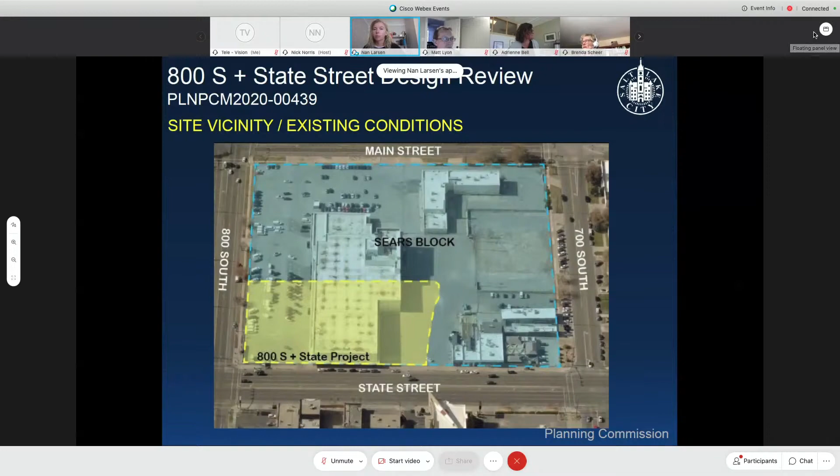Salt Lake City received a request for a design review for modifications to design standards to develop the property located at approximately 745 South State Street. The project is a proposed 11-story mixed-use development with 360 residential units, with common areas on the upper floors and commercial and retail uses on the ground and second floor. The project site is located in the downtown support district and is within the downtown master plan.

Presently, the project site is occupied by a vacant, what used to be the Sears building and surrounding parking lot. The Sears building was vacated in 2018 and has remained vacant since.

Planning staff is requesting the Planning Commission review the proposed design standard modifications as a work session to provide the applicant and staff feedback before the design review returns to the Planning Commission for a public hearing and a final decision. This work session is also a good opportunity to discuss the changes Kimball Investments and Colmena Group are proposing on the larger Sears block.

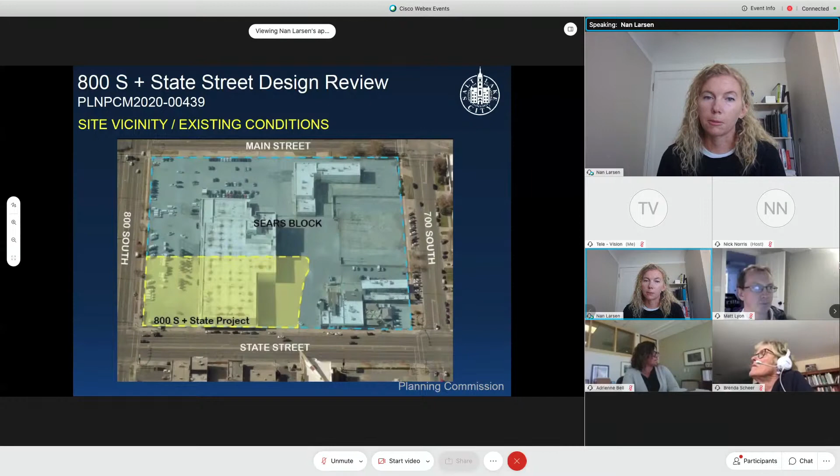I'll just go through a brief review of the project to give you additional time with the applicant to discuss for the work session. Presently, the project is meeting or exceeding the majority of the design standards required in the D2 district.

This includes ground floor use other than parking on at least 80% of the street-facing building facade. Durable building materials which cover at least 80% on the ground floor and 50% on the upper floors. Glazing covering at least 40% on the ground floor and 25% on the upper floors. And the blank wall maximum length of 15 feet.

The design standards requested by the applicant to be modified through the design review process include the maximum length of a street-facing building facade of 200 feet. The applicant is requesting 373 feet for the building length.

Additional building height exceeding 65 feet up to a maximum of 120 feet. The applicant is requesting 123 feet with a 5-foot parapet wall, which is allowed to exceed into the maximum building height. The final request is for operable building entrances at least every 50 feet on street-facing building facades. The proposal includes a range from 35 feet to 90-foot separation.

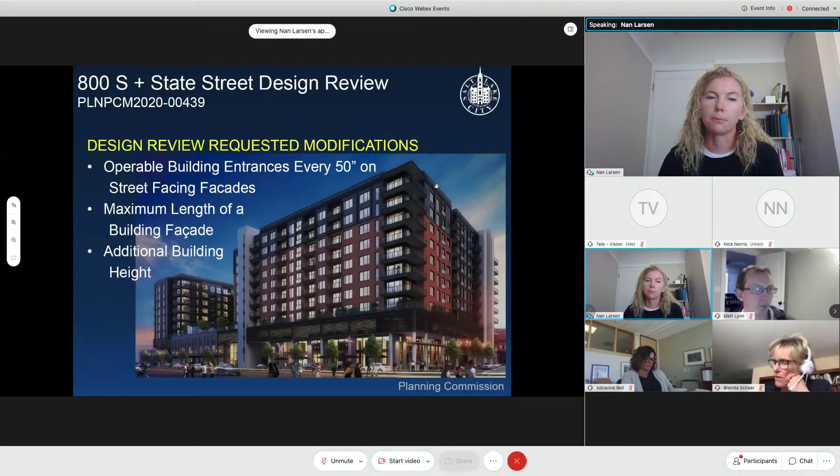Representatives with Colmena Group and Kimball Investment have worked with planning staff and have been very responsive to planning comments to change the building design to better interact with important city corridors.

Staff is recommending Planning Commission consider 3 questions in their discussion with the applicants to provide feedback on the requested additional building height and facade length of the proposed project. The first question is, are the setbacks, material changes, and glazing sufficient to warrant an approximately 85% increase in the street facade length while still maintaining a rhythm and repetition experience for the pedestrian?

The second, while the downtown master plan identifies South State as a mid-rise corridor, does the architecture justify the visual impact of the requested additional height by providing a well-designed building with a distinct top, middle, and bottom interest in the structure? And when determining whether the subject property relates to the height and scale of adjacent and nearby properties, should the redevelopment potential of adjacent properties be considered?

And that concludes my presentation.

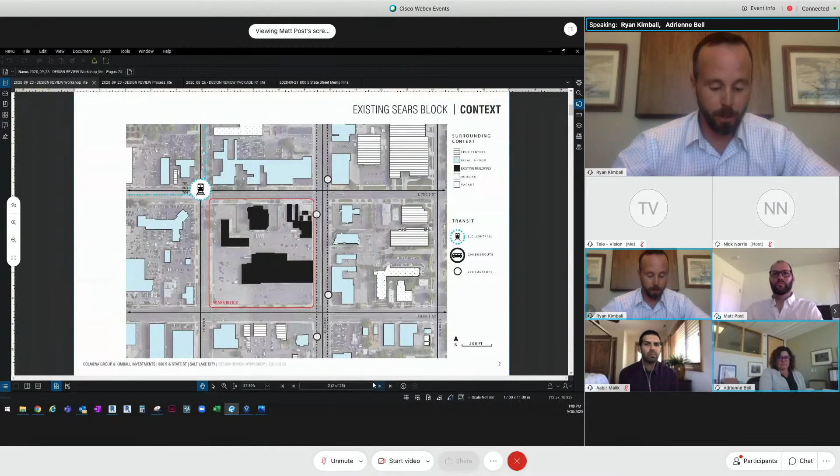Let's see, Matt, next slide. This is the block today. We are fortunate to have great neighbors. Center block along 700 South is the recently razed Deseret Mortuary, now owned by the LDS Church. SAPA Investment Group, along with Retrospect Water and Light, are just to the east, and we value each of them and very much see both as a benefit and amenity to our future residents and tenants.

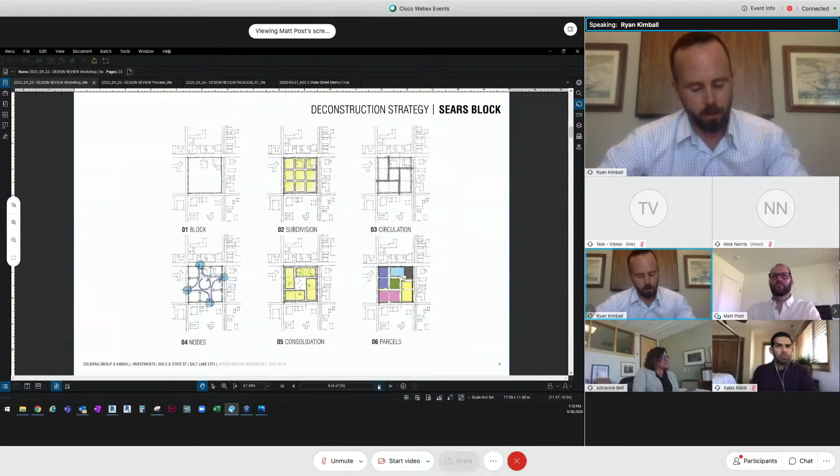The opportunity to deconstruct nearly an entire super block is really exciting. Our focus to create a strong yet welcoming edge with defined and accessible passageways into the center park, reminiscent of the interior community agriculture espoused by the Plat of Zion - the 660-foot-long super block was broken into 9 quadrants, each approximately 200 feet by 200 feet, separated by streets. We further refined the quadrants by connecting the ones along the edge to optimize the number of vehicular penetrations to the core. The strategy optimized the circulation of the vehicles within the site, as well as allowing pedestrian connectivity through to the park.

We have actively worked with the mayor's office, city council, RDA, and staff, and have noted the common sound bites from each, which include: Salt Lake's master plan shows downtown extending south to 900 South. Density was encouraged. Incorporate the city's Life on State plan, which specifically mentions living and retail opportunities with a focus on healthy and sustainable design, and proximity to transit.

We have worked with the city and others to successfully add a new TRAX station at 650 South Main, which is the southernmost Main Street station and critical to connect Copper Yards to historic downtown. The Jetty, along with the park, is the first phase of several and will begin to bookend the southern border of downtown, as well as kick off the State Street redevelopment area.

It is important to note that the Jetty is the only phase that faces a state road. As part of the master plan, we have met with UDOT to determine where our State Street access will be allowed. UDOT mandated the distance away from the 800 South intersection, which happened to also be the approximate location of the future mid-block crossing.

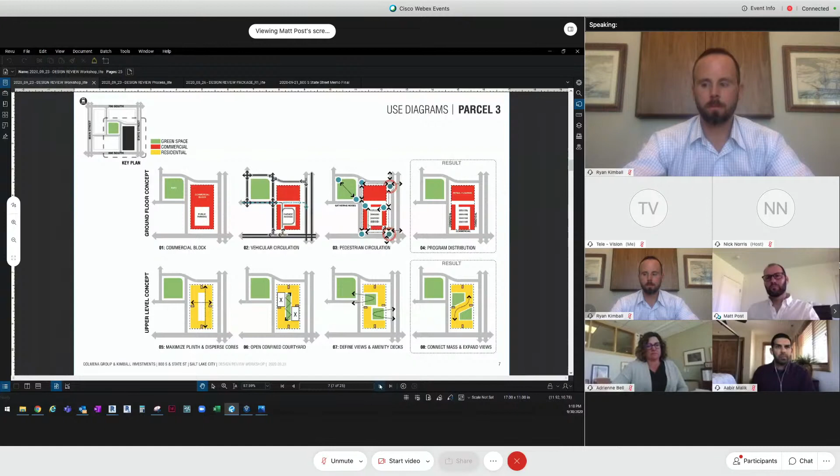So we started playing with the building in terms of allowing those spaces not only on the ground level, but also on the upper level that break the mass and allow us to have a different configuration as you walk around the building. In the book we provided, you have a lot of other diagrams that illustrate how the mass is being carved to articulate all of these design parameters that allow us to define the look of the building.

In terms of creating a base, we are very concerned about how the building interacts with the pedestrian experience of the sidewalks around the building. Not only thinking about the vehicles, but more importantly, thinking about what happens when you are experiencing that sidewalk, mostly along State Street, realizing the importance of the corners as well as the porosity to the park beyond.

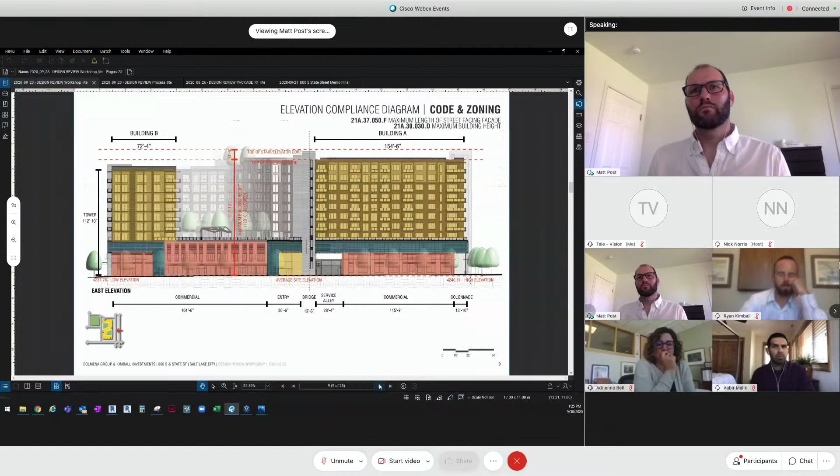In the middle of the building, we have that service alley that's becoming almost a divider, if you will, that creates this mass, and that's going to be the vertical circulation below the building, that is as important to us as it allows us to illustrate how the building is grounded to the site. You will see as well that it becomes iconic in the sense that it allows you to reference where the main entries to the apartment lobbies are located.

You also see that on the fourth level of the building, we do have a component that is an amenity to be used by - and this is a debate that our client's been having of how we introduce, let's say if there's a grocer on this site, on the big north part of the property, that maybe they could utilize that space as well. The question is how we provide a community of 300 or so, 350 apartments, a lot of people living here, with the opportunities to experience not only the city fabric with the park behind us, but also some spaces that are created above the ground right away, if you will.

The height of the building on the right side of this page, which happens to be the north wing, is pushing 11 stories, and therefore it gets right below the allowed height at 120, which counts for a parapet, and we are leaving ourselves enough room such that we know we're going to be able to drain that roof accordingly.

Nan was very careful about telling you that the building has a roof height of 117 feet plus a 5-foot overhang, the overhang being that eave on top of that roof line. There are going to be a couple of components, elevator overruns and so forth, that are a little bit higher than that, and roof screens that hide all the mechanical equipment on top.

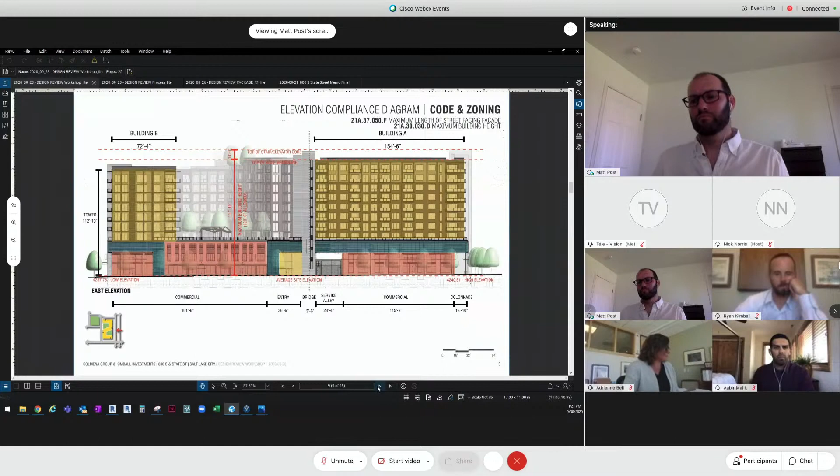But this, as difficult to read as it is, kind of gives you an idea of how we have played the mass to break it into different components. You give me the next slide, please.

So when you look at how the building feels as you come down on State Street, this corner to what we're calling Future Street A, defines that big plinth that is 3 stories in height with, on this corner, hopefully a market that is 2 stories in volume. We're going to allow the market enough space that if they wanted to have a mezzanine that, let's say, projects through with a dining space that hovers over State Street, that would be great. We don't know exactly what's going to happen, but the idea is that base is recessed back, so it's very inviting to people to come in.

This third floor that you see there is a parking garage. It's a full floor of parking that is hidden behind a screen that defines the base for the building as a whole. We're looking at different materials for that. It's going to be a metal that is hiding the vehicles, but it also wants to have some presence in terms of changing facade.

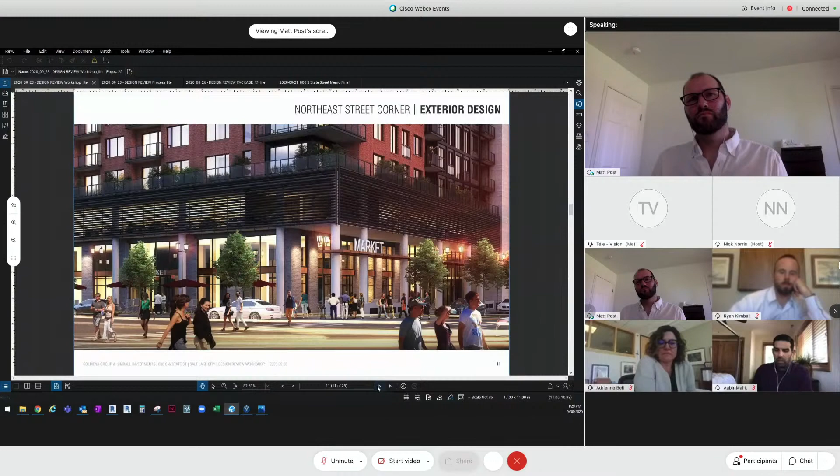Either with metal panels that have bandings or perforated metal materials. The colonnade that you see defines the superstructure to support the upper part of the building, but it also relates to creating an urban experience that is deep in nature and allows that porosity to the retail space on the bottom. Give me the other corner, please.

You're looking at the building now from the south side as we're approaching downtown from the south on State Street, and what you're seeing is that the building has a different look altogether. In the upper part of the building we have that orange color, which is a brick material, and the dark, almost black, we're thinking is a metal material, giving a sense of the industrial roots of this part of town, with materials that are rich and durable on the upper part.

On the bottom, you see how the facade now has changed dramatically. The plinth remains, and the retail base is very similar, yet it's now reflecting the nature of potentially a very different retailer. Abir and Ryan call it the idea of bringing the maker's block by allowing little spaces for boutiques or shops that relate to the demographics that can't afford the big space that a national chain may have.

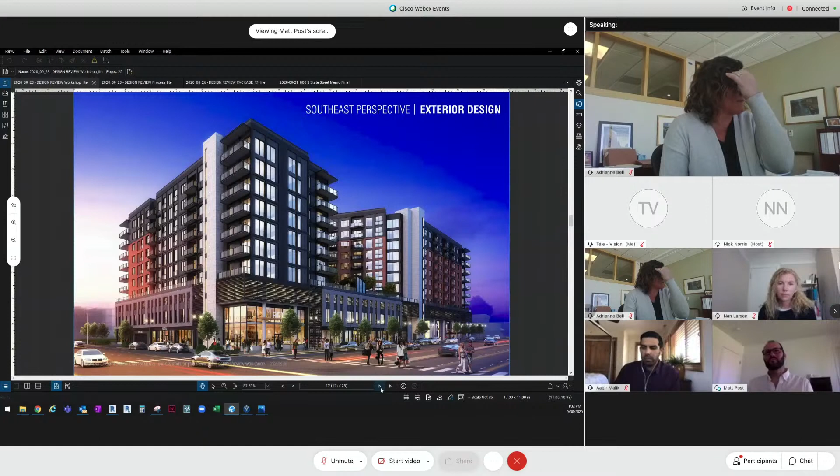The importance of the building having its own unique personality that is different depending on which side you're looking at the building from was a very important element in our discussion within ourselves and also with staff. And the idea that Life on State wants to improve the pedestrian activation of the ground levels.

So as I was saying, the activation of this southern part of the block along State Street is addressing a different type of tenant, and yet the corner itself has a very friendly encounter with the passerby via vehicles and/or pedestrian. What we're really pushing for here is the introduction of a lot of glass, transparency and porosity to the experience that happens between sidewalk and building wall.

And yet you see that the spaces are going to be 2 stories in volume as well, and the facade in this instance now continues up, still hiding the parking structure on the 3rd floor and being different than the facade on the north end of the block, such that the pedestrian experience is always encouraged by a different character of building facade.

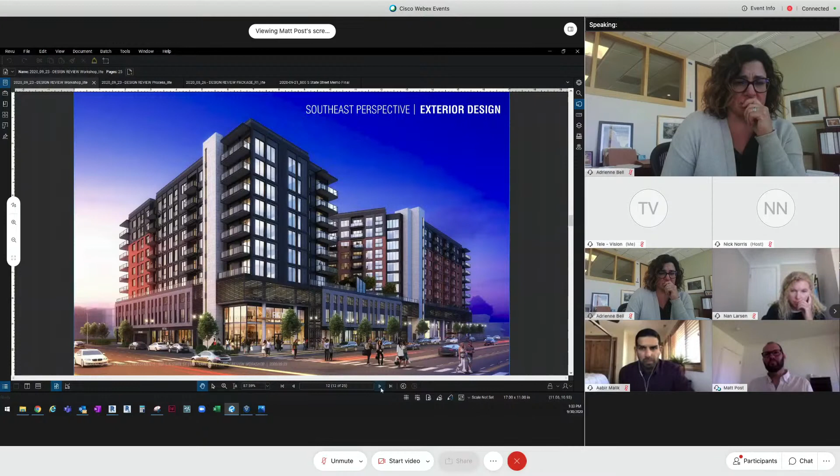And here's where, of course, we start to capture the tactile quality almost of the passerby who might want to see in, look up, and also maybe even touch the building, because it has a presence that is totally hiding the automobile behind, even though the boulevards are allowing a lot of traffic still.

Now we have a series of other views that are not as good as this one in terms of the articulation of the rendering, but it's allowing you to understand the corner as we walk you around. This is the middle of the building, the service yard, and the entry to the residential tower, and then retail on both sides.

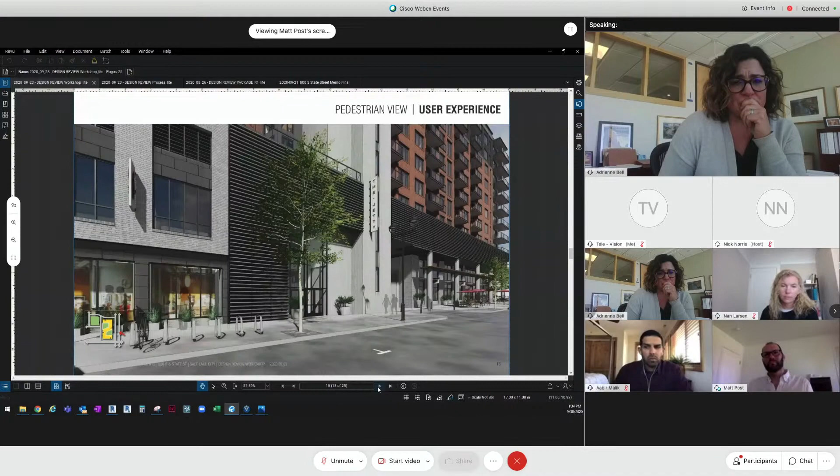As you're going down State Street, what can we do with the sidewalk? It's not that deep. As I said, Life on State is trying to widen the sidewalk such that the pedestrian experience is enhanced. And yet we are still thinking that with the ability of introducing a lot of glass here, we are creating a little more depth to that feel of pedestrian activity.

Now we are looking at the building from the southwest.

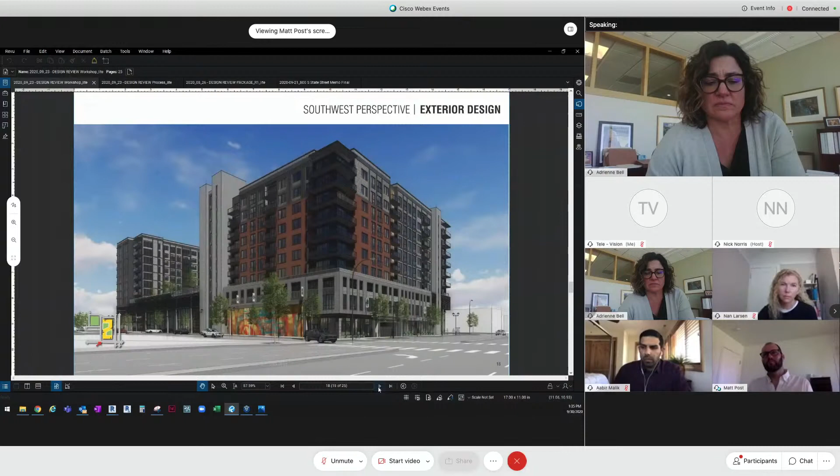You see that this is kind of our back of house at the ground level at least, but we have to put these very large panels that we are thinking we're going to treat as art walls, and those are the rolling doors for the transformer enclosures. Our hope here is that with branding, we can create a story that is not only about the building, but about the neighborhood, in terms of allowing the ability to introduce art to the facade.

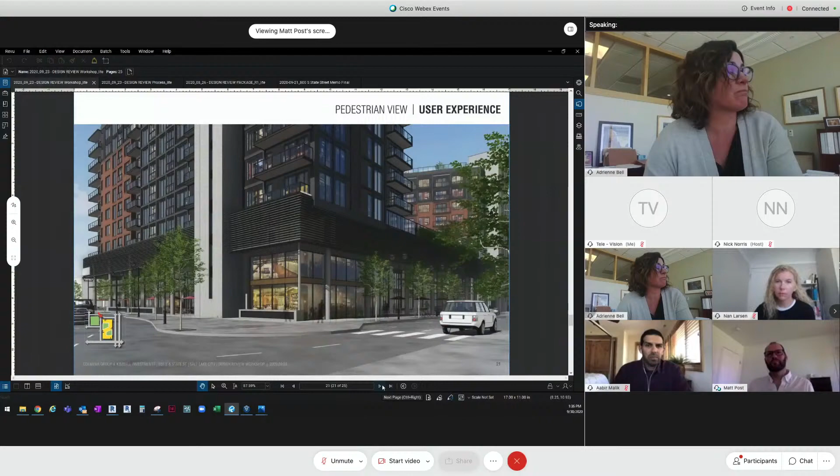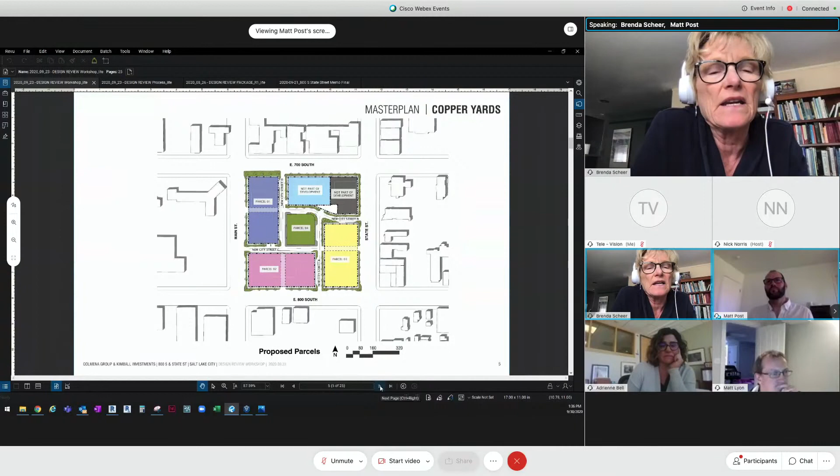So let's go back to the slides that show the master plan for the block, which I believe are really in the beginning, right here. Let me ask you, what is the status of this master plan in terms of approvals for the subdivisions and the park itself? Is it going to be a dedicated park, a public park, and what's the status of the streets? I know in your subdivision plan, you have two of the streets that appear - the one coming off of State Street and the one coming off of Main Street - but the others are not in the subdivision plan, and neither is the park. So I'm wondering where all of those things are.

Yeah, that's a great question. Thank you, Brenda, for bringing that up. So right now, the status of this master plan is - if you're familiar with the block - there's currently a city road that bisects the block, coming in off of 7 South, and it dead ends into the existing Sears building. That's Major Street. Yes, I'm familiar with that. Yep, so we are working on vacating Major Street, so that we can then move forward with the park and some of our other roads. Since that hasn't been done yet, we are moving forward with this first phase under a parcel line adjustment. Then, as we vacate Major Street, we'll be able to move forward with the rest of the interior street grid. And to answer your question about the park, it will be available and accessible to the public.

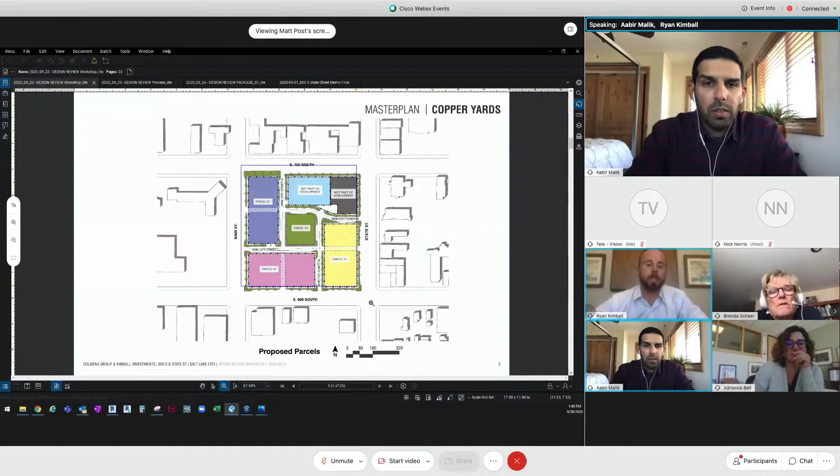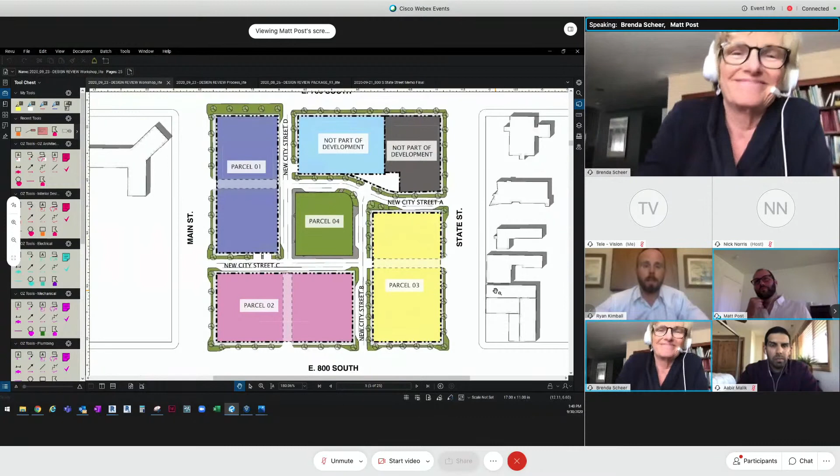Yeah. Additionally, the park will have, in all of our StormTech chambers, underground water detention for all phases, so a lot of that underground infrastructure will go in at that same time. The park cannot be perfected in its entirety until the vacation of Major Street, but we really hope to have that timed in a way that all of the... I don't know, that's not my mic, but all of that will.

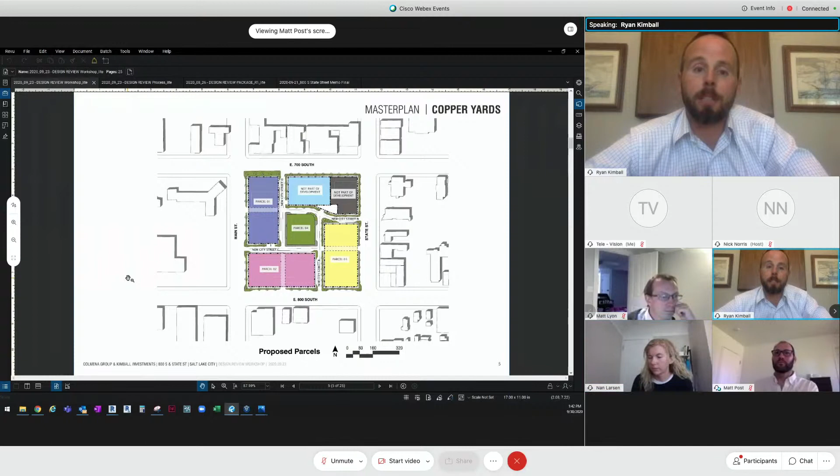Did that answer your question, Matt?

But the size of the parcels is longer than if you were to build lot line to lot line. The length of that building would also exceed the requirements in this zone, correct? So you would need exceptions for building length for the other development parcels. I think that's the question.

Well, and that's to be determined. At this point in time, we're not asking for that consideration. We understand, but you're creating a lot that could accommodate a building that would exceed the length of what's permitted. Correct. Okay.

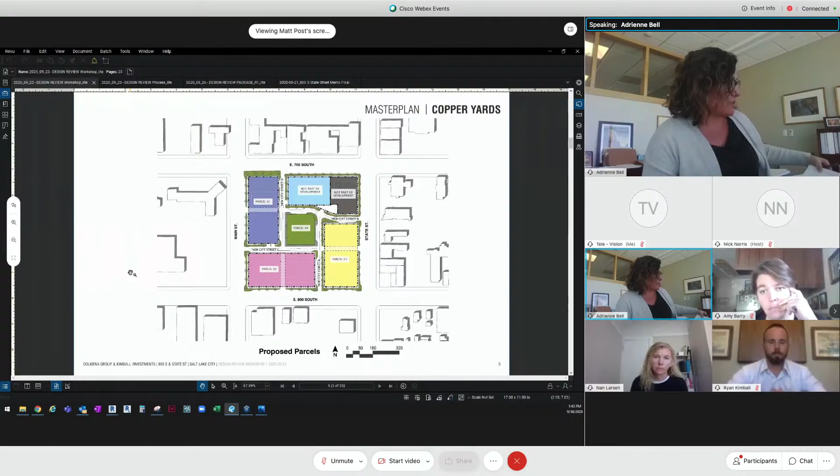Any other questions for the applicants? And then we do want to address the questions that staff posed. So if people have comments on the 3 questions from staff.

Can we get question number 1 back up? All I had time to write down was, are setbacks sufficient? And now I can't quite remember the full context of that question. The questions are in the staff report, I think under the discussion section. Yeah, and I don't have my staff report with me because I didn't charge the Nook thing, so I couldn't access it today.

Put your slide back up that you had in your presentation, Nan, that would be great. Okay. Nick, can you allow me to share my screen? Okay, I'm sharing my screen. Are you able to see the questions? Yeah, we see them. Great. Thank you.

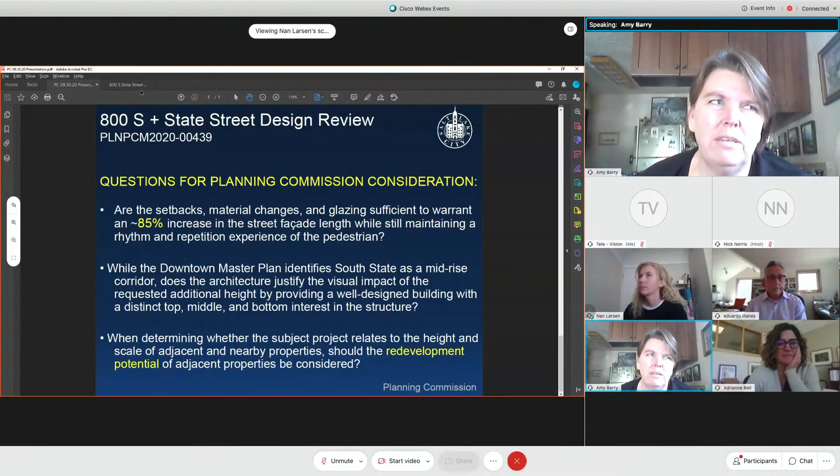So in terms of the first question, regarding the requested increase in street facade, do others have thoughts to share with staff and with the applicant on this question? Yeah, and I apologize for not remembering to charge that thing, but this is off my normal schedule, this meeting. Can we look at the street level of this development again? Because I don't really feel like we did enough to really get an idea of how we're engaging. Look at that eye level at the street to really kind of ascertain what this might look like at 373 feet long.

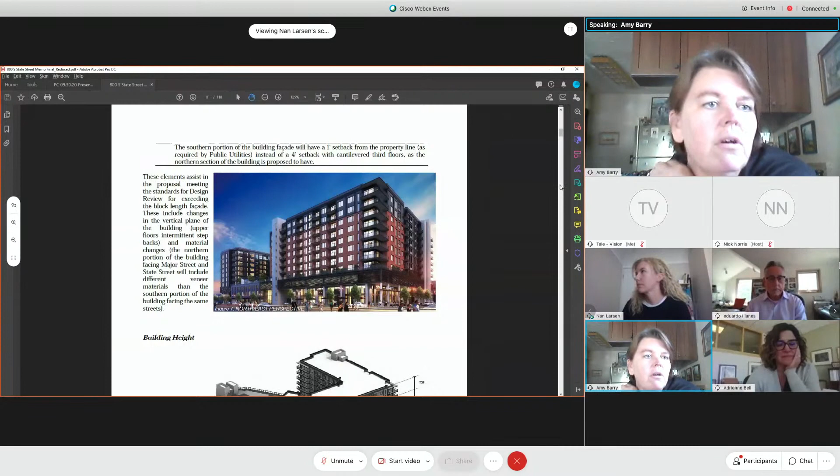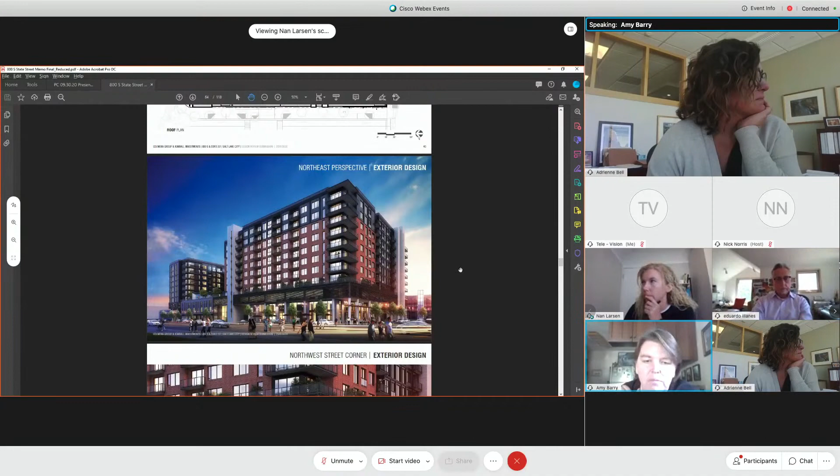Are you looking for the renderings? Yeah, something to give you an idea as a pedestrian, what we're looking at. I mean, this kind of helps, but it's hard for me to say if I think all of these things, the material changes and the glazing, etc, are okay to allow 373 feet, because that's a lot more than what we allow at 200. I don't really feel like I'm getting a good idea of what it looks like from the sidewalk even, to see if it feels so big, if it feels so long.

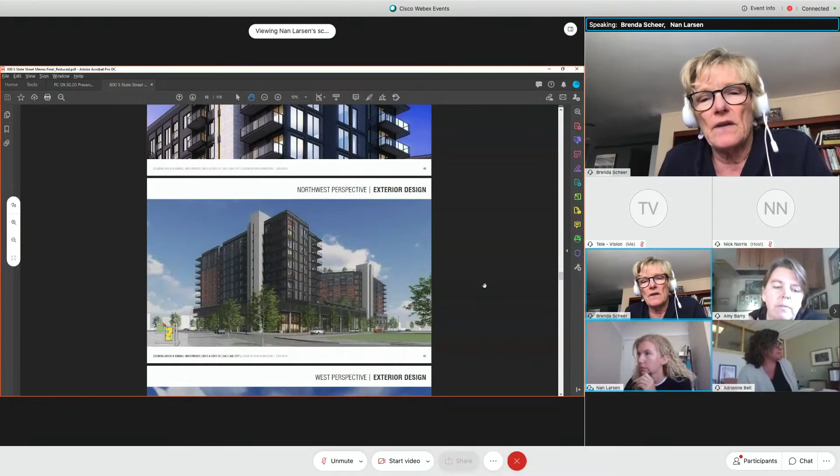There were renderings from the developer in their presentation that were at sidewalk level. Yeah, I'd like to go back to those, but then I feel bad that I'm making you flip back who's presenting. I was wondering if Nan had something, but I get that. Don't think I do. I think the applicant has it.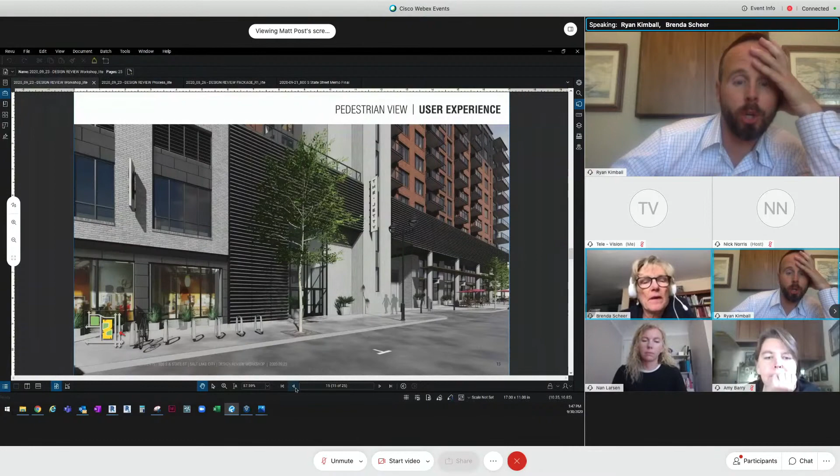Hey Amy, while Matt puts it up, I wanted to mention, on the Maker's Row, which is what we're calling this side of the building, the storefronts are very close together. Our intention with signage and design is to make each storefront unique and really break up that experience.

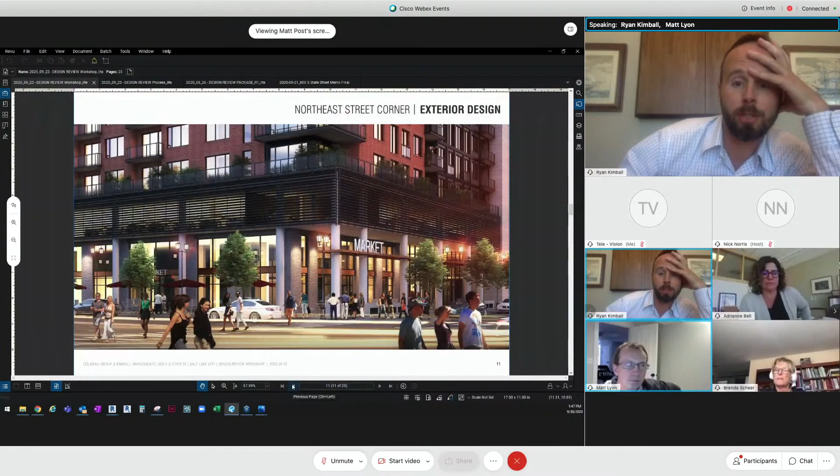On the north side of the service entrance, Eduardo may not have mentioned this, but the building actually steps inward inside that column line to create more of a table experience and also create a new experience at the pedestrian level walking on the sidewalk.

He did mention that. From this view, it still feels really, really long. I don't see visually enough relief — if you were a pedestrian walking by, I don't think you'd feel like you got relief from this building. It feels really big, and I don't know that I'm keen on 373 feet at this point.

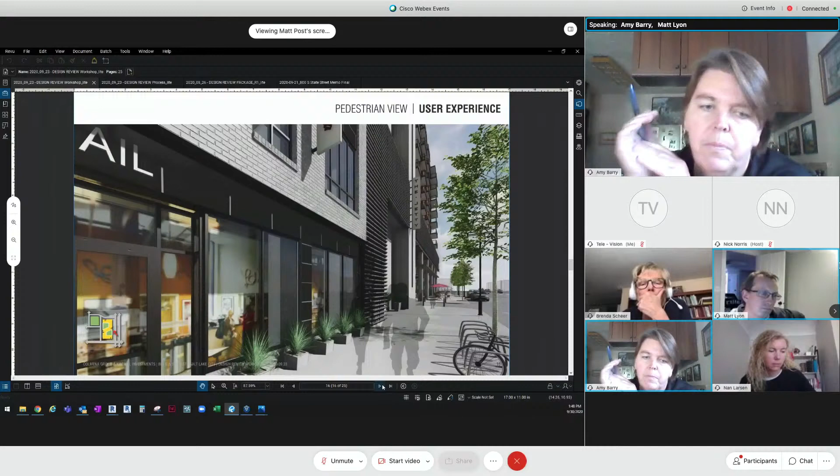Yeah, I think that makes a lot of sense. Hey Matt, could you jump to the site plan real quick, the ground floor plan?

So Amy, to talk through what's happening at the pedestrian level, I think this is a helpful diagram. On the left is north, and at the top of the page is State Street. The area of Retail 1 against State Street, as Ryan indicated and Matt mentioned, is set back. It'll have outdoor dining and a very different feel to it.

The service alley, while it's not— Yeah, can you tell me the length from that top right corner at 8th South and State Street to what you're calling the service alley? What's the length of that? Sure, Matt, do you know that offhand?

There's another slide where A and B is broken up. Yeah, I can't remember what that length is exactly. Maybe Matt can find that out. It's 115 feet from the building corner, not including the colonnade, which is open space, to the edge of the service alley.

But that service alley doesn't go all the way through, does it? It does, yeah, the service alley does go all the way through. If you go back, Matt, to the ground floor, I can walk you all through that a little more.

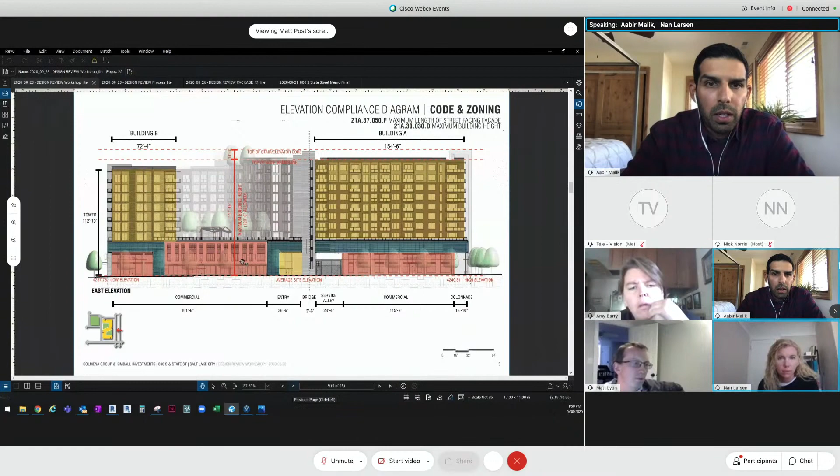Cars will pull in from the bottom of the page, and public vehicles will pull into the garage. However, we'll have gates so that all service for the building — whether inventory for retail tenants, trash pickup, or utility vehicles — is done off street. We wanted to maintain that vibrant living edge of the building. So all service takes place in this service alley, and those trucks have one-way access onto State Street. This was what we were able to convince UDOT to allow.

They wouldn't allow it to be a public street because, as Ryan indicated, they have certain queuing requirements at the light at 8th South. So we weren't able to get a public road through here, but we were able to get a service drive through. Trucks enter on the west, drive all the way through, do their business, then drive out on the east. That's exactly right, it's one way.

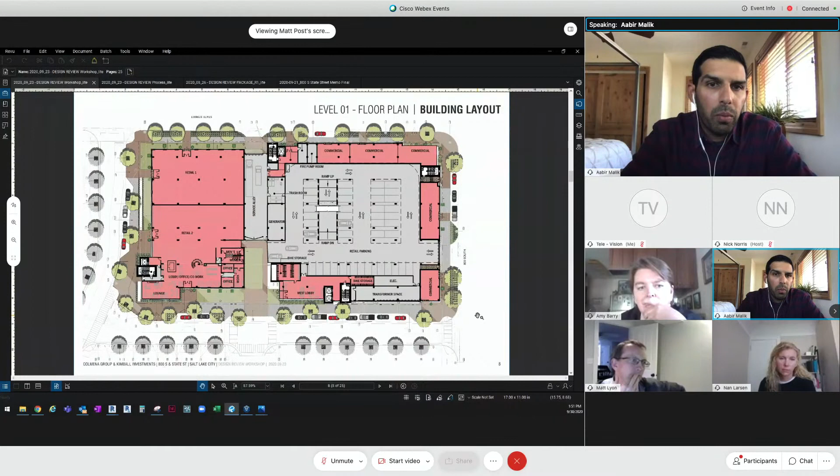And are there garage doors, or is that area closed off, or would a pedestrian be able to look down and see the whole alleyway while walking by? No, it's not intended to be an overhead garage door. They're more like swing gate doors that'll be access controlled, opening when a truck pulls up so it can get access in, and then the gates close.

So I'm wondering what that looks like on the east side as a pedestrian, because there was that concrete wall that seemed to jut out to your property line. What's happening there? Because I feel like in some regards these almost two buildings could be broken up better.

And this is the key point, I think — right here is the service road. Yeah, and how that's looking from a pedestrian point of view, so it doesn't feel disengaging or like a place you're not welcome. No, for sure. And Matt, before you jump to that next slide — Amy, if you look right to the right of the service alley, you'll see that white stair tower.

That's what's jutting out, and that's kind of defining a building entryway, but that's breaking up the ground floor experience. So you'll walk across a grocer on the left, there'll then be this service alley, and then you'll see this white concrete element, and then you'll have what we call a maker's row.

It's the small commercial space, the hat maker and the ethnic food owner. It's getting them the ability to have an affordable address on State Street. So, Aabir, you're saying you're going to have a haberdashery? I didn't know that was a word, but if that's a hat maker, those are the types of tenants we're trying to go after, like the makers in our city.

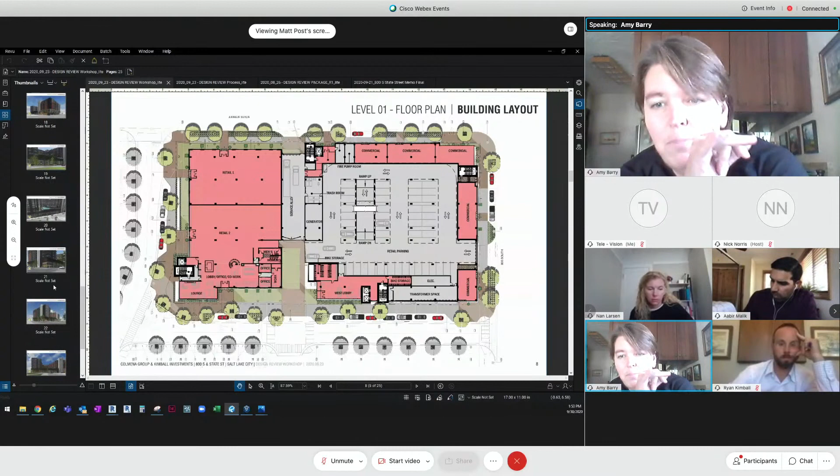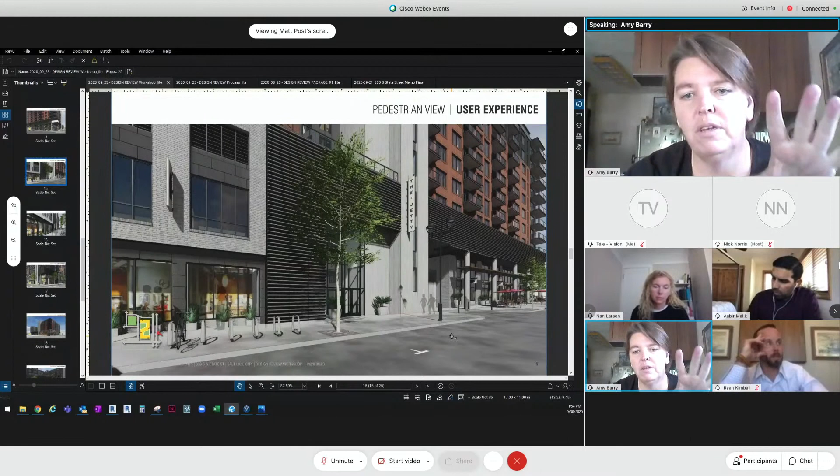So I really feel like I want to see more how that section is treated for the pedestrian in the future when you come back, because I don't think you really have what I'm totally looking for, but I'm really concerned about the feeling of 373 feet. I do believe if we're treating this point better in terms of the visual aspect of that gate, so it doesn't feel like when you walk downtown and there's those service alleys that have the big garage door that has to go open, and it doesn't feel inviting, it doesn't feel like it fits there. So how you treat that, how that stairwell access wall is coming out visually to being treated as a pedestrian, I think I'm going to really want to see more there to come to terms with that 373 feet being okay.

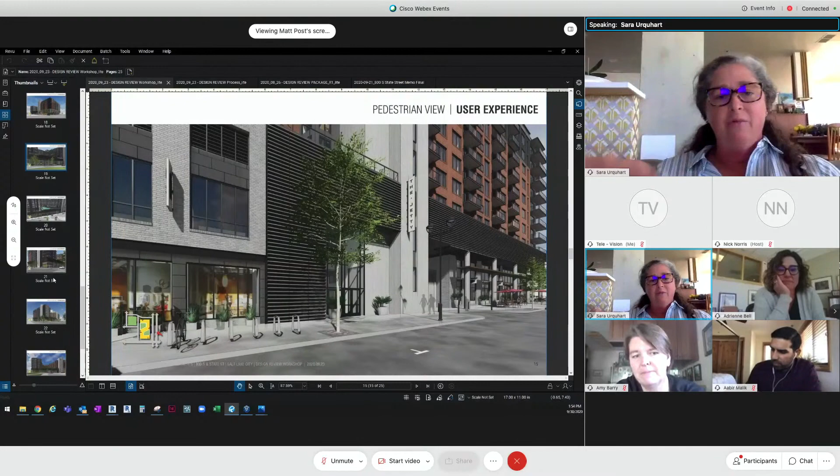I agree with Amy, and if I can jump in, this picture is a perfect example of this feeling almost like a hidden entrance. I want this to be a statement entrance for the space, so that there are all these entrances for the small haberdasheries and such, but then there's also this big statement for the residential. And I'm speaking from experience living in a downtown high-rise. Make that sign bigger. I want something to say this is a home, and this is a home for many. Do something there to help have interaction with the pedestrians, and people in and out.

So that would be jumping on Amy's comment, that's great feedback. Thank you, Sara, and thank you, Amy. I've got those things written down. We'll make sure that we show a little bit better experience of what that gate is like from a pedestrian standpoint. So thank you.

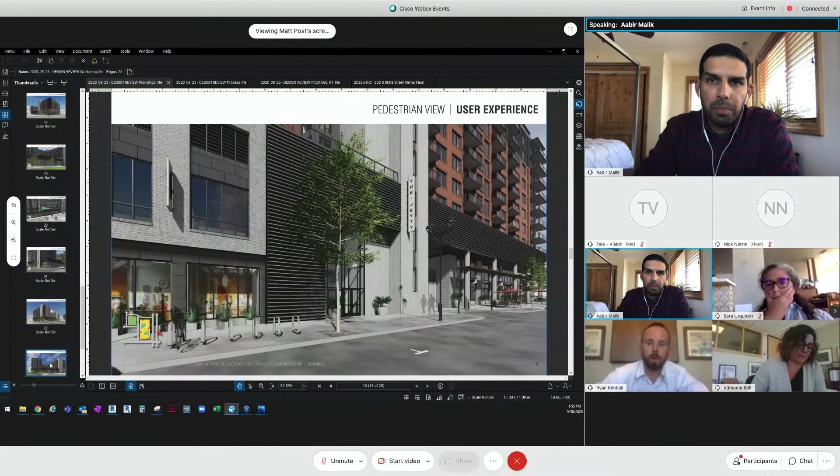One thing too, just to emphasize again, is that we were concerned with the length as well, and UDOT is really what dictated the length of this building. I like the idea, Sara, of making this more prominent as well. This is actually not our main entrance, the entrance is off Parkside, but nonetheless I like your comment. Just wanted you to be aware of that.

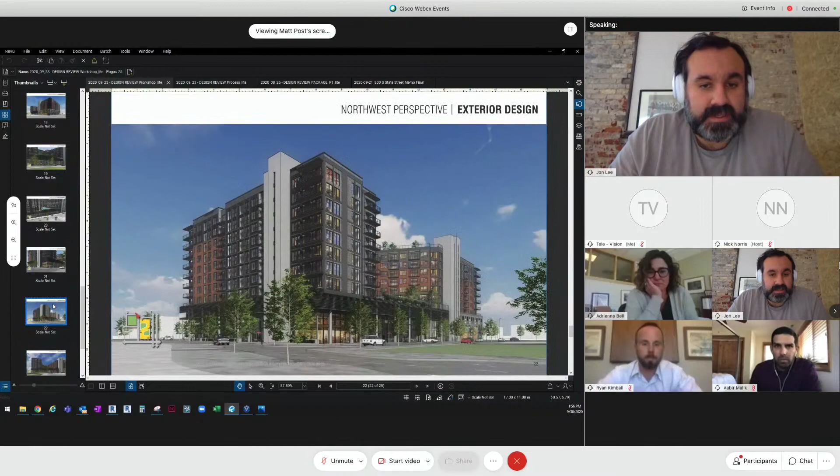Yeah, the thing I would like to add is I think it would be helpful seeing an elevation or a rendered view, like maybe the one on the screen, that talks about some design guidelines for the retail space. It's difficult to design a space without having a tenant. So what are we allowed to change when you actually have someone move in? Are they going to change just the sign, or will they be able to change the facade in a way that creates a unique experience for that specific store? I think telling us more of that story and letting us understand how you're going to break up that facade throughout the whole block would really help, because right now it's a very repetitive design, especially on the ground level, of the same storefront over and over again. I'd like more of an explanation of how you're going to approach that and what is allowed through your own design guidelines.

Yeah, I can speak to that. You're right, right now we don't know—it's speculative space meant to be demised. That being said, from a structural standpoint, Eduardo touched on our bulkheads; we can open those up and make those custom. I think we can work in illustration and with the renderings we're showing now, even speculatively, on how to better do that. It's a cost tenant improvement issue for those smaller makers, so I think it behooves us to try to make it the way Planning Commission would like to see it. But just know that when tenants come in, if they have the budget and credit to allow us to take out those storefronts and further customize them like you're used to seeing larger credit tenants do, that's engineered to be allowed.

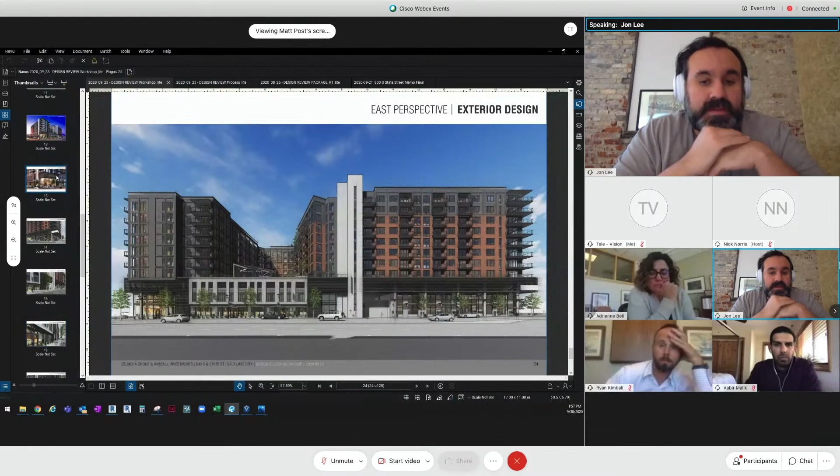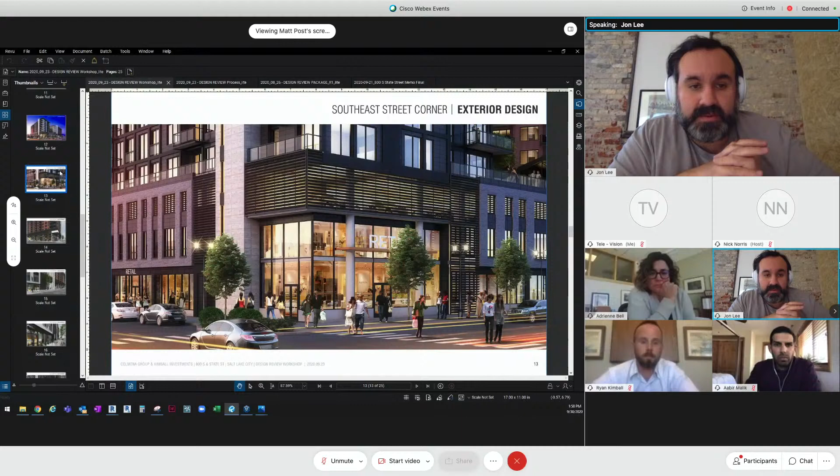My other comment would be, I appreciate when there's a cohesive design thought throughout a project, but on a project this size I hate seeing five different facade materials overlapping and changing haphazardly. But I do feel there's a bit of a monotonous facade happening on some parts of this building just because of the sheer size.

So it'd be nice to see some way of addressing what you talk about. The architect mentioned how approaching from different angles you're going to get a different experience, and I like the way that sounds, but I'm not really seeing it in the design. Maybe there's a different balcony treatment for the different facades, something that integrates it a little more. They feel a little tacked on right now.

I think finding an overall way to actually create that experience is important - if you want it to feel like a different building coming from a different direction, it should feel a little more different. I don't want to dictate how to do that, but visually it feels very repetitive. Even though I love the diagrams and think they make sense, and the bones of the building are really there, it's just figuring out how to create that experience you're talking about.

Thanks, Jon, for that. Just to clarify, are you referring more to the residential portion of the building, or are you referring to the ground floor? I'm referring to kind of this rendering in particular, where we were talking about this approach feeling different than the approach coming the other direction.

And yes, there's a little bit more glass, but the balconies on this treatment feel very similar to the other side. Really, the only change that visually, at least in the rendering, feels different is the color of the brick. And I feel like it's fairly repetitive.

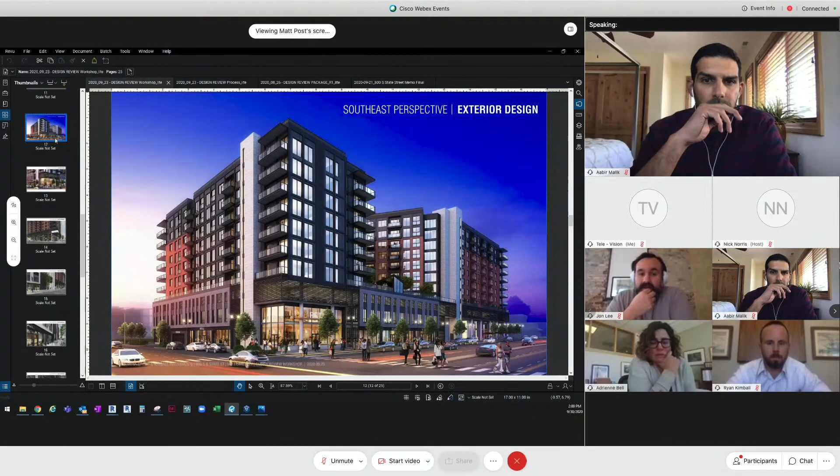May I ask a question? Very good comment as it relates to the upper part of the building. How do you feel about the material changes to break the mass of the pedestrian experience on the ground levels?

Say that again - are we talking about the upper level now or the ground level? No, your comment referenced both, but the idea that on the upper levels we're using metal and brick, and that's the balconies.

Yes, indeed, it's a good comment you made. My question was more now about what do you think about the base of the building, the first three levels, in terms of how we are breaking the mass to avoid the idea that this is 370 feet long.

Yeah, I personally do feel there's a little bit of repetitiveness there as well, where you have those rectangular portal areas in the middle of the building. I think making that corner a little more iconic and making that feel almost like a piece that draws you in - to me that would really anchor that corner, because right now I feel like it is kind of mirrored almost around the corner.

When you're trying to orient somebody and explain where you are, like say you're getting picked up, how do you explain and have an iconic space where you can say, hey, I'm right here next to this? I think that would help a little bit break up that ground level as well. And I get that there's some economy to repetitive features and detailing, but I think creating those focal points are really important, especially on a corner like that.

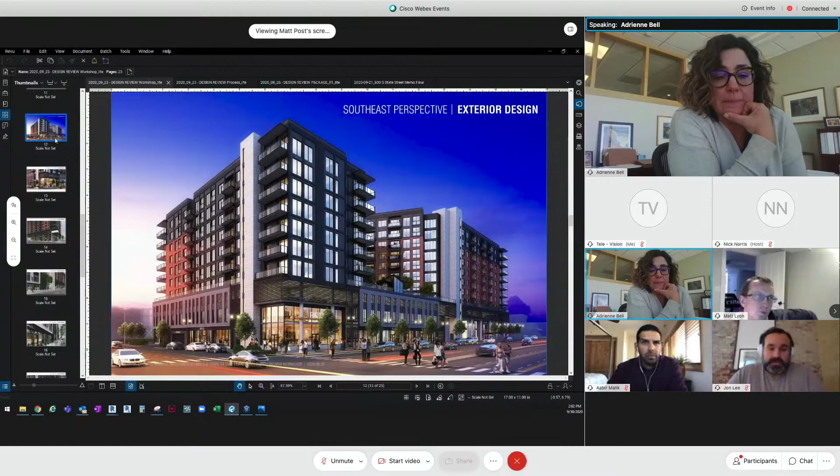I'd like to touch on the other two questions Nick posed for us: whether the architecture justifies the additional height, and whether we should consider the redevelopment potential of adjacent properties when evaluating this application. I'd like to speak to that first, because one thing that hasn't been hit on too much here is that the first level elevation with the retail spaces.

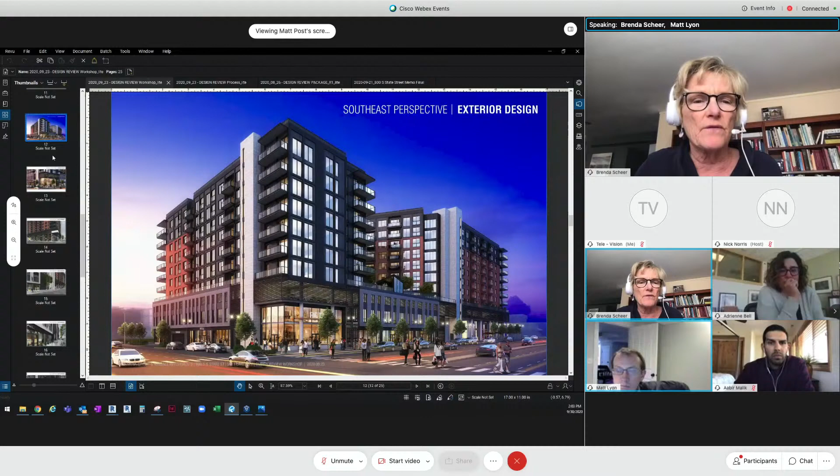Those spaces are two-story height. This is something we rarely see, and it's really a terrific addition to this building. There are mezzanines in part of the larger retail spaces, but having that height really gives a sense of anchoring the pedestrian experience. We often get something squashed at that level, barely larger than the floor heights at the residential level. So to the extent that's enabled by having extra height on this building, I think it's very, very well worth it.

I think it's actually kind of miraculous that this is occurring here. So I do think the height issue is less of an issue perhaps than the length of the building issue.

I would echo Brenda on that. I think height always becomes a problem where you have to squash the bottom floor to accommodate the height of the units that pay for the building. So I agree - this is creating a public space with a more robust nature, and then having the residential on top.

I think this is where the city is headed. We're preparing for a massive amount of growth, and these are the types of projects we're going to see more and more of. So I think this is actually the right direction for scale, and then it's just figuring out ways to make it feel more human scale and break up the masses as we develop these large blocks.

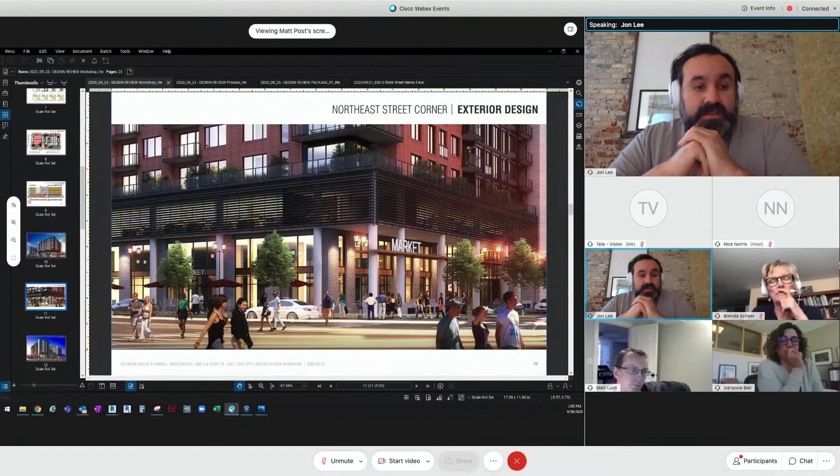Great, thank you both. I mean, the height - this is allowed through the design review process, correct? There's nothing special being added, this is allowed by right. And so presumably other buildings in this area will come through this design review process as well, similar height, further north as it comes into town.

Is that correct with staff? Yeah, that's basically correct. One thing not related to this project - we will be considering changes to the downtown building heights in the next 12 months, so just to put that out there, they're probably going to be increased.

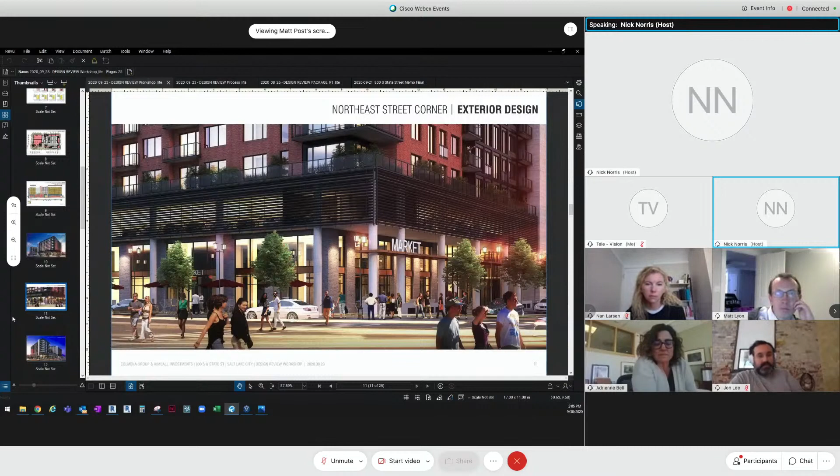And then thoughts on consideration of the redevelopment potential of adjacent properties? Yeah, I think that's actually really important when we're looking at this size of development and redeveloping almost the entire block. So I think that's super important and one of the reasons these working sessions are valuable.

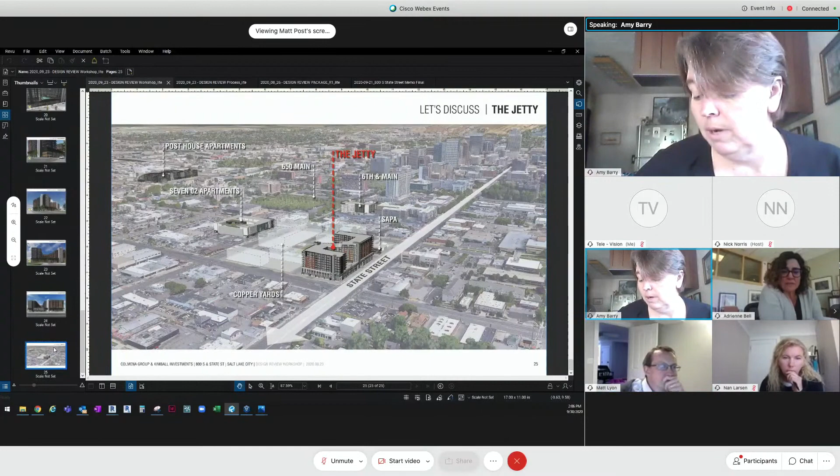One thing I'd throw out to you guys, Kimball and Columna, is that when you do these other buildings, since you'll be dictating the majority of this block, make them look different. Make your buildings look really different so they're not all just the same stuff over and over. That's something I'll definitely pay attention to when you come back.

But height doesn't bother me - I think this is a good place for it, a really good place for it. But to staff, you should absolutely be looking at the potential and how they want to make these connections and piece this block back together, because that gives us a better picture of what we should be focusing on now - those mid-block connections and how we're going to circulate.

And if they don't have answers to that, then I think it's really hard for us to evaluate how this building would fit in it. So yeah, I think that's an important part.

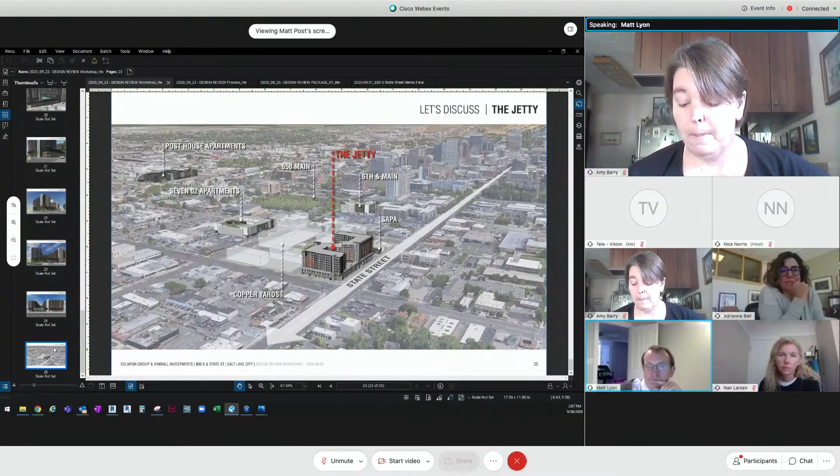Hey Amy, just to give you a quick answer on some of this. It would be a lot simpler for us if we just owned a 2-acre piece like 762 or the 6th and Main, where we're just coming in for that. Abir and I spent a lot of time with the Oz group trying to figure out long-term how we're going to activate this block. And again, to try to activate 4 sides of 3 buildings is a lot of retail, and how to bring that into that park. So for us, we're not going to be constrained by UDOT constraints on the other corners, number one.

And number two, to get 350 or so residents here, 600 plus people is a really good way to kick off that retail from a nighttime perspective. And then obviously the hotel option or the office option is great synergy for the daytime uses. So we have a big vision for the block. I wish I could speak more concretely on those other uses, but just know that we aren't constrained by UDOT on those corners.

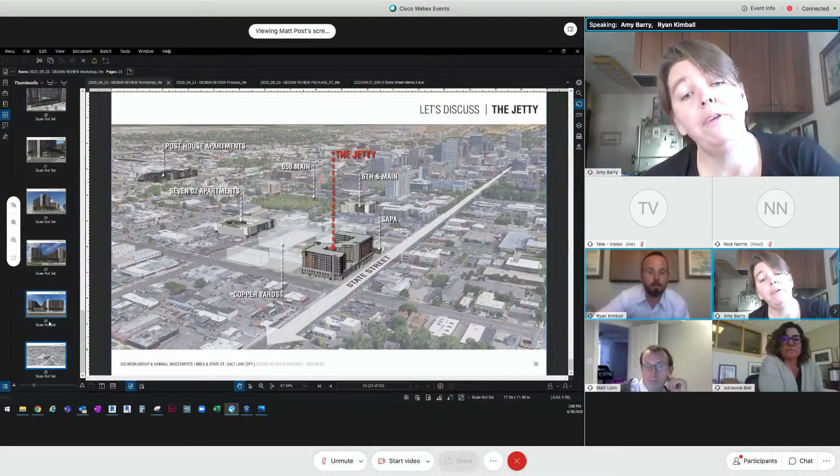I haven't done much with you, Ryan, but I've worked on many community projects with Abir. So I feel good that it's in the right hands to look at that future.

And the question for Nan and staff is, should you be looking at what the development potential for those other areas are? It doesn't mean uses to me. To me it means how this block will look configured and how it will function in those mid-block breakups and whatnot. And you successfully presented that. So for staff, I think that is super important for us, or for me.

I'll just speak for me. It's super important for me to get a better idea of how this project that's before us right now will fit, because I'm going to look in the future too at how would we break this up. So you did a great job for Nan. I think this is the type of thing when we're looking at this size of development that I need to better understand the bigger picture and the long term of how potential redevelopments will affect each other. But I have faith that Abir and his haberdashery will do well here.

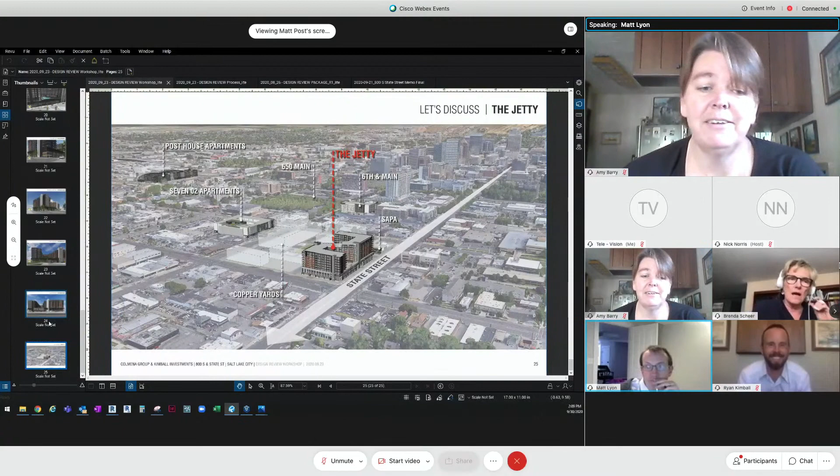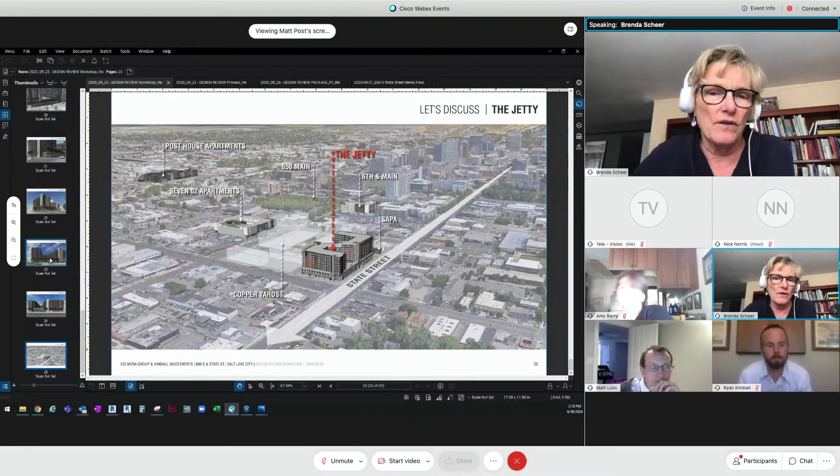I would like to come back to the issue of the length of the building, and I'm fairly convinced on the State Street side. But I am pretty concerned about one of the things Sarah was talking about, which is the importance of delineating the entrance to the residential building. And certainly on the park side, on the west facade, which we really haven't talked about, you still have that same length there, but with far less potential to have the haberdashery breaking up the facade and adding interest.

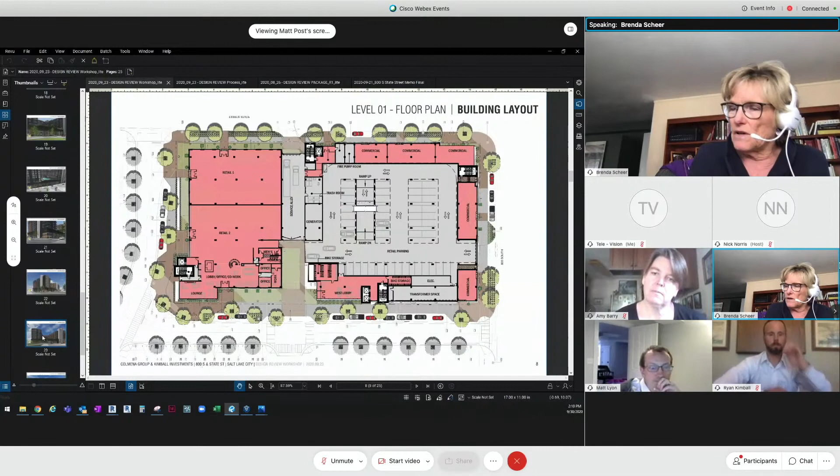So I'm looking now at page 48 of our staff report, which is the rear facade. I would not call it the rear, it's actually the entrance facade for the project. And I think, I don't know whether it's just the rendering that's underdeveloped, but it doesn't seem to me to be as interesting or clever, and I think it needs to be interesting and have some better indication of that lobby, that it's not just another retail area, that it's something different.

Isn't that the only entry on that entire length? When you go further down, it's like mechanical stuff and whatnot. Yeah, when you go down farther, it's mechanical stuff, which doesn't bother me. You have to have that somewhere, and they've got it sort of sliced in there, in what is not on the park and not really on a side street.

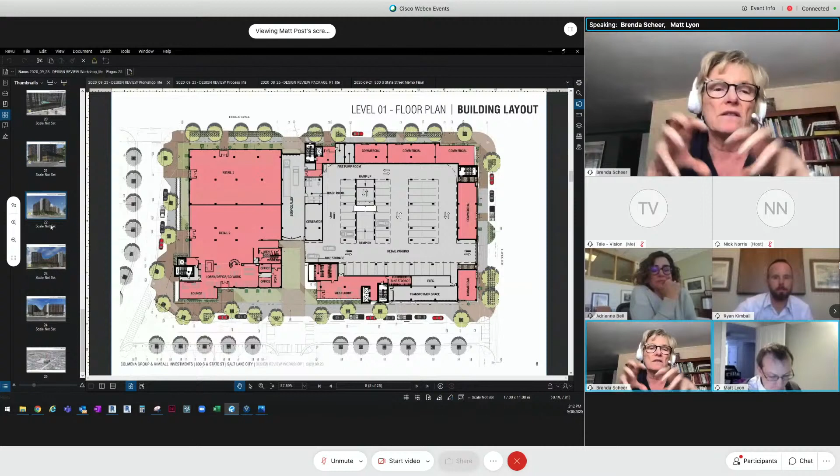But I do think that it just seems like this is a really underdeveloped side compared, especially to the kind of thoughtfulness you've done on the State Street side. So I'm just asking that we consider that point that Sarah was making about the residential entrance and how that really plays in response to the park and everything else over in this area.

In this particular instance, for example, you have that large screen, that black screen for the parking garage going across the whole thing, right up to the edge of the circulation tower, that makes it seem like it's all one thing, even though it's not all one thing at all. There's retail, there's a lobby, there's an entrance to the parking garage. And that entrance to the parking garage is the one that retail users will use.

So if you're going to park to go to the haberdashery, you'll go in there. So it seems to me like that articulation needs to be a lot different, and more conditioned on what's actually going on there.

Brenda, I actually have a question following up on that. I had that same issue with that third floor screen on the other side as well. It feels like it goes along that whole way. I was wondering if the fact that it's on the third floor will matter, thinking of a pedestrian walking by and my interactions with buildings. I don't know that I ever know what's on the third floor. From a distance and from the park it matters, but I'm wondering, because that bothered me on the other side too. I don't know the solution, but I'd love your perspective, and of course the developers'.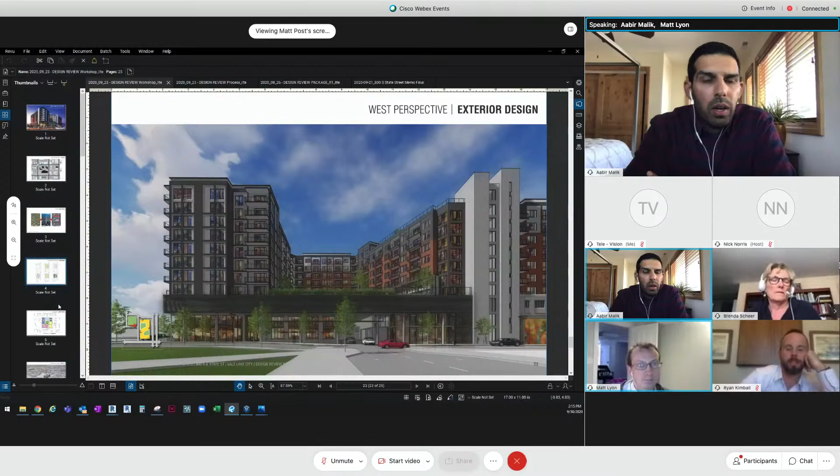Matt, if you could just go to the floor plan real quick. On the north side of the service alley that's facing the park, what you see there is actually for new residents, prospective residents — when they walk in, this will be kind of the lobby where they'll meet with leasing staff, but it's actually going to open up into the retail space.

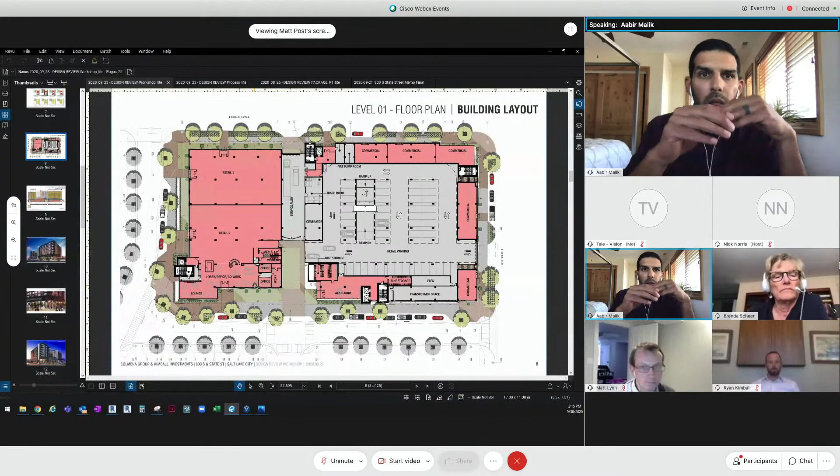We want there to be a kind of blurring of the lines between what happens in that lobby and the activity happening in that retail space. We're anticipating that'll be some sort of food service retailer or restaurant that's kind of open there, and that's all going to have outdoor dining facing west, facing the park. So it's going to be very active right there.

And then to the south of the service drive, we've got the residential lobby — this is what Ryan was alluding to. This is the primary lobby for residents who live at the building. This is where they're going to walk in and out of, and there's a lot of elements there.

And then unfortunately, we think that this is part of the CBD of Salt Lake City, but Rocky Mountain Power does not, and as a result they're making us put transformers on the building facade. It took a lot of back and forth, and I don't want to bore everyone with the details, but originally this was on State Street per Rocky Mountain Power. We worked with them to move it off of State Street, so we do have a large transformer space there, but I think we'll do something cool with an art element to bring some public art onto that street facade.

And then the other thing that should be noted is above the office, the leasing office in the lobby, there'll be a mezzanine. I'm so glad, Brenda, that you acknowledged the two-story volume — that was really important to us.

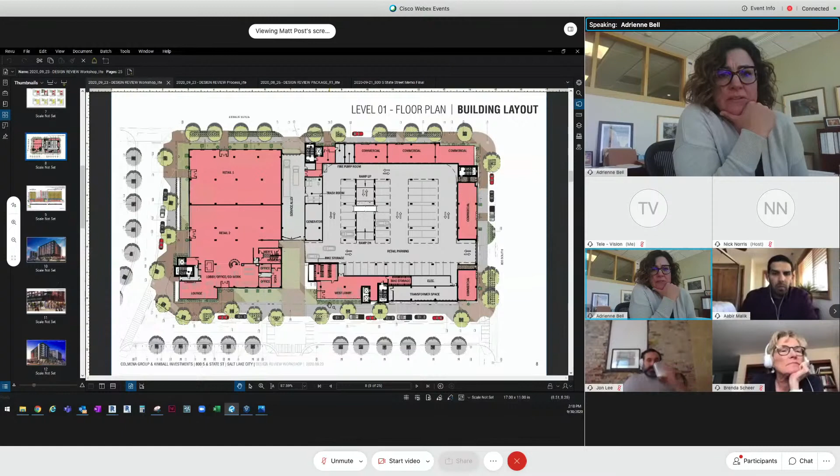Ryan, I don't know if you want to tackle this question. Yeah, honestly, it has all of our underground infrastructure in it, and we do plan on, or at least want to entertain, maybe doing some single-story structures on it for like coffee shops. So we want to bring in food trucks and engage it. As far as future development goes, honestly, it's an amenity to all 3 of our corners, the office bleeds onto it as well, and so we haven't really thought of the need to deed restrict it. If you feel there's that need, I'm open to consider it, but the green space was entirely just for our own amenity's sake and not necessarily meant to be restricted.

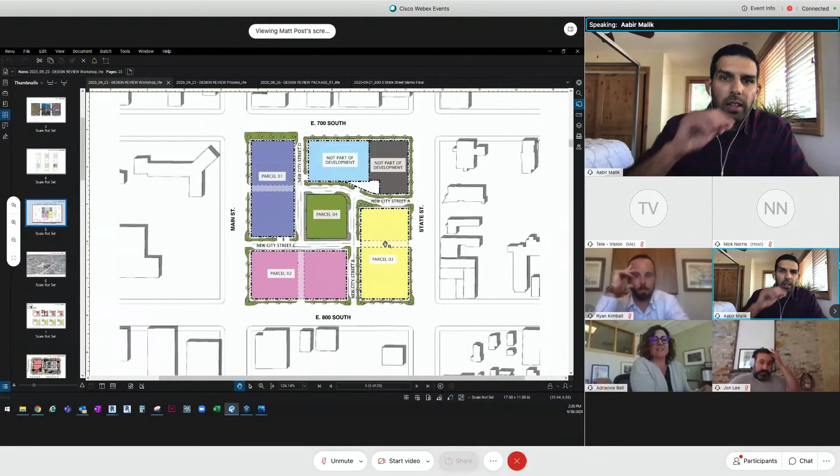And just to add to that, the green space in the middle, our park, is the heart of our block. We want to make sure that we maintain an active edge for sure, but for us the central amenity for this entire block is bringing green space into the inside of the block. This is where there'll be a hub of activity, where we anticipate people dining, walking their dogs, and throwing a Frisbee. I'm not discounting its importance to your project, it's clearly very important, but if for whatever reason, 10 years down the line, somebody has a different vision for that space, then it's a very different type of project.

That's my only question. And I think that's very valid, and you bring up a good point. Ryan and I, we're not merchant builders, this is a legacy development for us, and honestly, until you just brought it up, we had no intentions of selling it. We're holding this long term, indefinitely, so for us it was just obvious, like, oh yeah, this is going to be a park and there'll be nothing else. But you're right, I think we should look at that, if something unforeseen happens and we don't own the property indefinitely for whatever reason, we think that's a critical element for the success of this block.

So yeah, well, first, there's no room for foundations. The StormTech, and just how the discharge point into this stormwater system is so low, we only have a few feet of coverage between the top of those tanks and the sod or whatever hardscape's there. So it really is...

That may be sufficient, there was just a question from my mind, ensuring that this remained open space if that's part of the plan and it's not being dedicated. Yeah, no problem, that's a valid question, I'm going through it myself, just trying to figure out the answer to that. But that's our biggest concern, is just how we even can build anything on it, due to the lack of depth of the tanks.

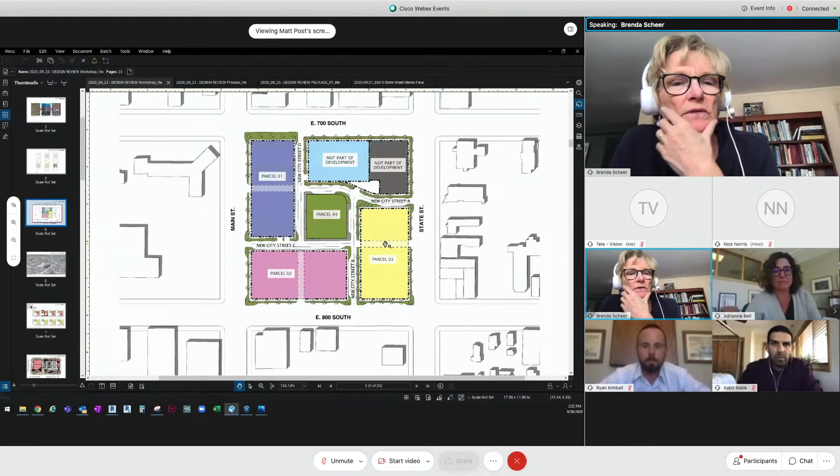I would just like to add, because you guys brought it up, that the lack of depth also means you won't be able to have significant vegetation like trees, or water features. Right now it's a bit just green—what I used to call with my students green slime. We don't know what it is.

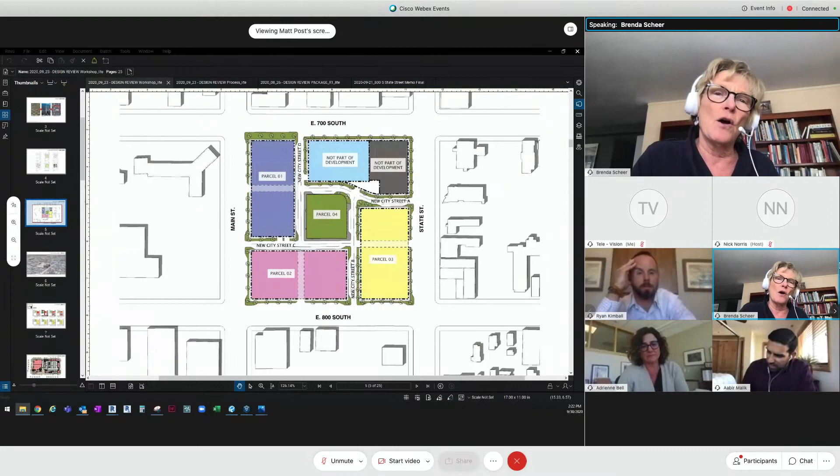I was looking at it thinking it's going to be like Rittenhouse Square someday, in Philadelphia—it's beautiful and not too different in size from this. But if it doesn't have the possibility of having vegetation, because it's basically just an underground water system with a green roof on it, that makes it different than a park.

Brenda, the nice part about StormTech is it's one of the many systems we can use, but there are a series of tanks that connect, and you can modify that configuration. We haven't gotten into that level of detail yet. We have sized it—surprisingly, it takes up about the entire park, but we plan on having about 50% of the park be hardscaped and 50% be landscaped, so that it's very usable.

I think between raised planters and how we can space the tanks to get the root systems to work for where we want the trees, we'll have the ability to make it beautiful. It's not meant to just be a tank with some slime on top. It's an important feature to Aabir and I, and it's meant to look and feel like a park, with a lot of places to sit and enjoy it where it's not necessarily grass.

If it would be helpful for next time we're in front of you, we can show some of the designs we're thinking of for this central park—anything that will get us to the point where we can really see this happening. It also helps with public perceptions of this project. If people see that whatever we do in the planning commission approvals, one of the things we're getting out of this is an amenity that the public can also use, which is really good.

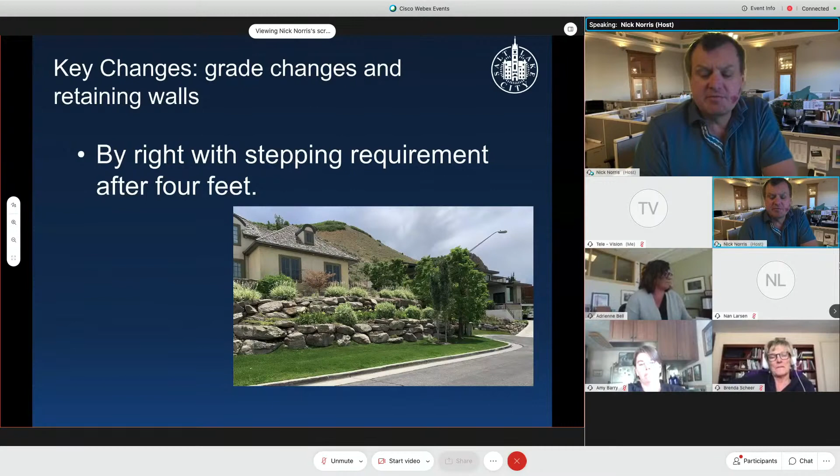Building height is another one of our most frequently requested proposals. It would go away, and instead we would rely on the development pattern of the block face. So if you have buildings that are taller than the maximum allowed in the underlying zoning district, you could get the average of those taller structures instead of having to go through a special exception. And obviously the Landmarks Commission will retain their authority to increase height when it's compatible with the historic districts.

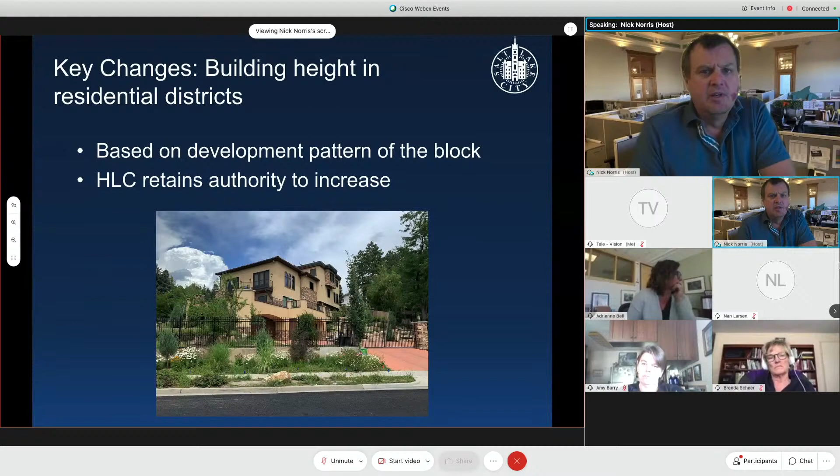Accessory structure height - we're not changing anything by right. However, we are proposing a change to the code that would allow an accessory structure to go up to 75% of the height of a principal building, provided the setbacks increase. Right now, any accessory building in a residential district can go up to 17 feet in height. The SR1A and the avenues, primarily in Capitol Hill, have different standards, and those wouldn't change. But this would allow those properties that do have taller structures to increase their height as well.

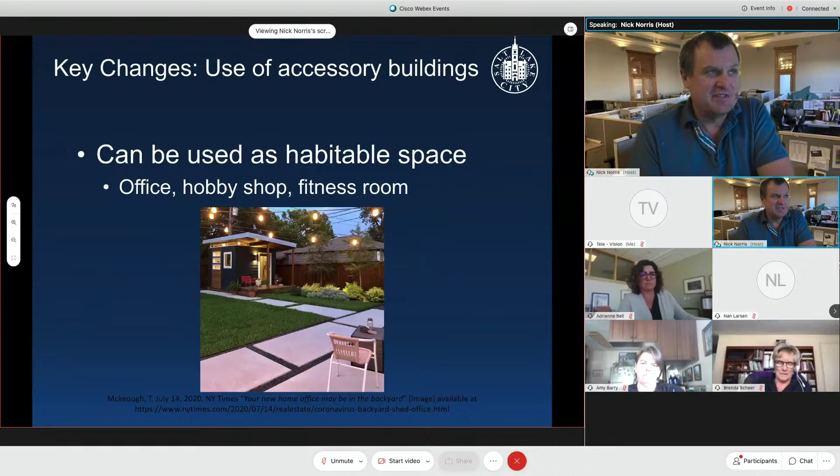For how accessory buildings are used right now - if you want to locate an office, a hobby shop, a fitness room, or even a changing room for an outdoor pool, technically you're supposed to get a special exception for those things. That's not really reflective of how particularly rear yards and accessory buildings are being used now. So these would just become by right - you can do these things. It doesn't make sense in our mind that you could do these outdoors without any kind of special approval, or under a covered patio, or do an addition onto the home that's essentially a shed, and do it by right. So that would be a change.

It creates new impacts to neighbors that they weren't anticipating or expecting. This proposal would eliminate it in the side yard, but allow it in the rear yard and the front yard, primarily because those setbacks are generally larger and there's more space.

Non-complying buildings, these really aren't, a lot of things are listed as special exceptions, but these are really property right issues. And we want to use the non-conforming chapter to address these.

These include replacement of segments of buildings or accessory structures, eliminating the conditional use, which you guys have seen some of these things where somebody in a zone wants to rebuild or expand a single family home that is in a zone that doesn't allow single family homes.

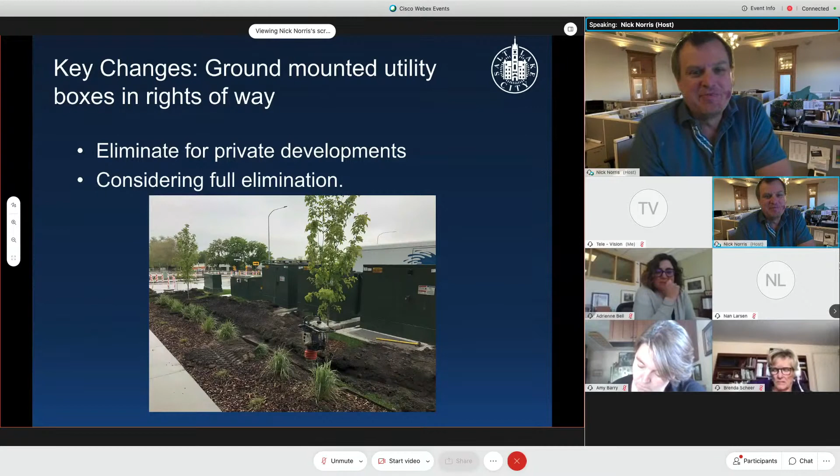Just to give you an update on the community input, info has been sent to every single community council and recognized organization. We sent a request to AIA Utah to spread the word amongst the architecture community. Architects are one of the more frequent applicants for special exceptions representing property owners.

One thing that I don't know that the Planning Commission, maybe you guys are aware of this, but since COVID in March, we've shifted all of our open houses online. So we don't do in-person open houses anymore. And we're starting to get some data on what that means as far as how many people are engaged.

Normally for an open house, we'd get less than 5 people to show up for an item like this. And the great thing about website analytics is we can see how many people have accessed it and downloaded the information. You can see that for something as exciting as special exception changes, we've had 135 people access the online open house page or download it, and 179 who have viewed the page.

So just a couple of questions. I don't know that we expect answers here, but if there are some follow-up questions from the commission, we went over these through the presentation that was super short, and I probably talked too fast. But if anybody has any questions on these or wants to add any input, we're all ears.